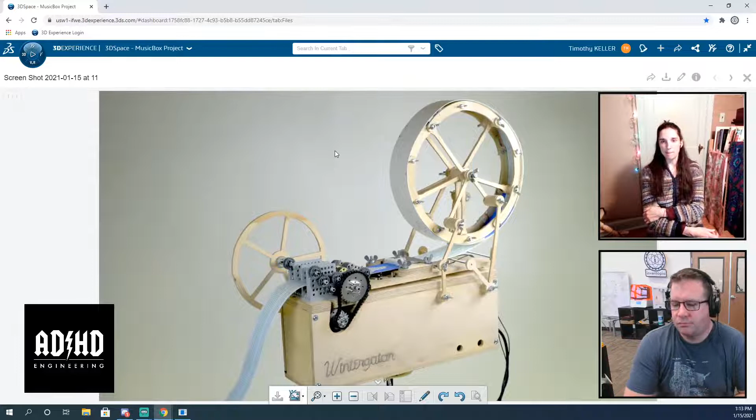So there's still going to be that aspect to it, even though SolidWorks has all sorts of PDM fancy tools we can be using. We're still going to have to tailor it to what we need. But I think we have a much better idea right now about what we're going to need than we did back in May. Yes. For sure.

Yeah. So the idea here, and Jordan, I see your question, we're going to be working with a PDM. Yes, and we're going to be using not the client-server type PDM system SolidWorks has. We're working with the 3D Experience platform, their PDM system. And it comes with project management stuff,

a bunch of stuff that the current Marble Machine team, like right now, Mo is dealing with. We have a bunch of things in Discord. We have a channel for posting status updates. We have a bunch of stuff in Airtable. And so SolidWorks has given us these tools, which is awesome. And don't forget Google Docs. Oh, yeah, Google Docs and inside Fusion itself.

Yeah. So we are trying basically to use the professional tools. Anyway, we're going to be using the SolidWorks stuff as much as we possibly can. But because the project extends beyond SolidWorks, we're still going to have to be using Airtable and stuff. Because we're not going to import the entire database that's full of video and photo reference into SolidWorks because it's already ready. Right.

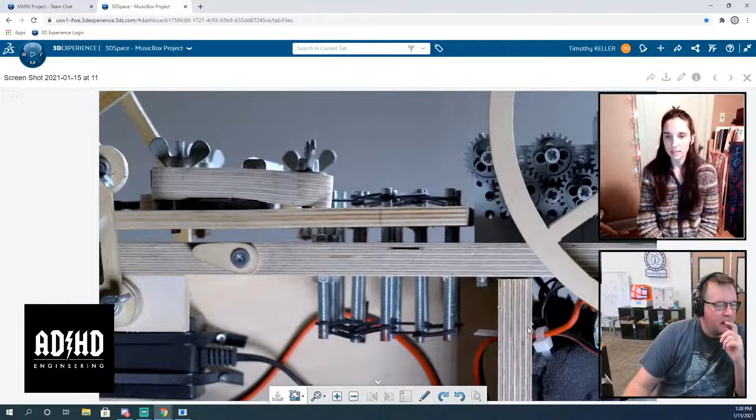The one that was actually on stage. Yeah, some of the electrical wiring was where it wrapped the ground around the whole wire. Yeah, I think there's room for lots of improvement as far as electrical engineering goes. So here's a picture of how that thing folded up and collapsed. Now, if we don't have a collapsible wheel, potentially the entire thing could be just a soundboard. Yeah.

David's asking if there's a specific Pelican case model already determined. And David, thank you for volunteering to find us a Pelican case size, and we'll design that as a constraint. No, I'm not joking, right? I mean, I think I do. I don't know what Pelican cases are. What's that?

They're rugged, foam-lined equipment cases. Pelican's a brand, but they're kind of like a violin case. Let's look up Pelican cases. They have foam, and then you have these little inserts, and you can actually have them custom made, where you give them the shapes. And no, they're not cases for Pelicans. You can upload shapes and say, hey, I want this part to be this deep.

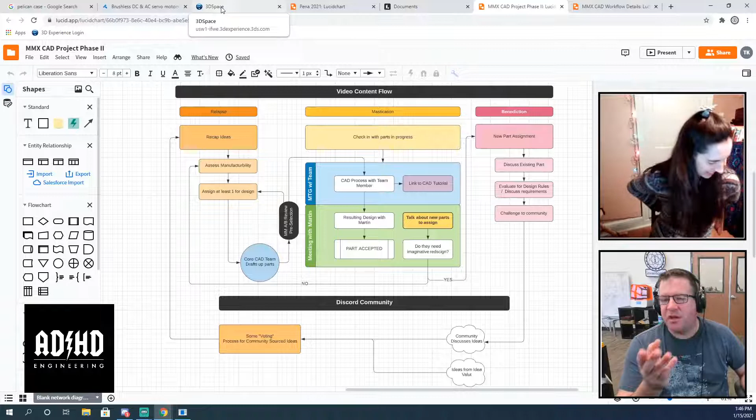What Andre just said was not too far away from the way I was thinking. I was thinking that basically when we had some ideas we liked, we would pick somebody who has one of those 20 seats to be the champion for that idea, right? Yeah, or maybe we'd assign them. We'd have 20 seats and maybe 20 ideas. So going around in a round, whoever hadn't been assigned an idea lately.

So the first 10 people get assigned to the first 10 available CAD designers. They work with the Discord person to work up the idea. Ooh, I like that. That's cool. And then next week, the 10 who didn't do anything this week could start on the next designs. I like it. That might work.

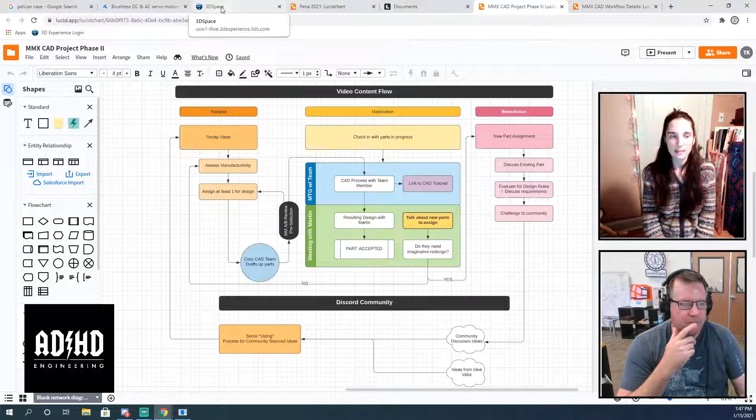Yeah, so someone on the team who has one of those 20 licenses is working with the person who brought the idea in the first place if it's external to that team. Okay. So they would sort of be like the team leader, but everyone would be collecting ideas for the same part. And then whenever one would get promoted, whoever happened to be working up that idea would get that part assignment to build it up inside SolidWorks. Yeah. No, that's figuring stuff out. Woo.

Oh, someone asked me a question. Is the internet finally working? Yes. The internet wasn't the problem. It was my poor old laptop. It's on the floor right over there. Don't feel too bad. It tried its best to serve me well. So I forget what I was going to say. Oh, sorry. No, it's okay. That's why this is ADHD engineering. Yeah, don't feel too bad about the old laptop.

I just recently dumped like 3 old laptops from my closet. I think I held on to them because maybe there's a picture of one of my kids on them, but you know what, lithium-ion batteries, man. I ended up dropping them all into an e-waste bin at my local dump, and I didn't feel bad about it. I thought you were gonna say dump them into a river on your way to work. That would not be ecologically responsible. It sure wouldn't. Okay, we're getting a little off topic, but I'm still running Linux, people. That wasn't the problem. The old laptop was the problem.

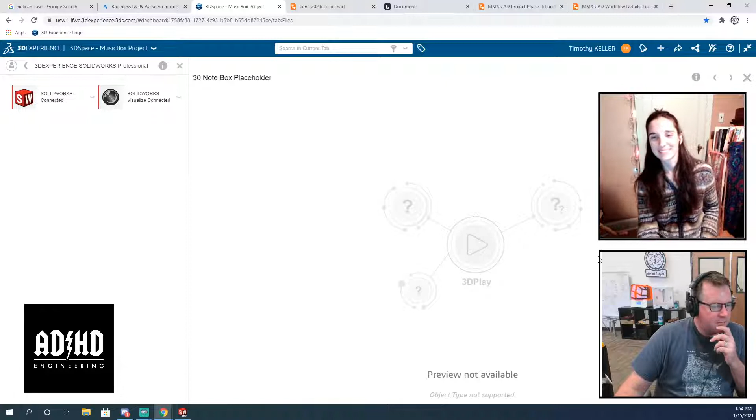I just crashed SolidWorks again. Good job. Do we need to start a crash count? Is that 2 so far? Should put a nickel in a jar every time it crashes. Oh, that would be so awesome. We should definitely do that. Where'd you get so many nickels though? Actually, I have lots of tiny things around my studio here. I'm sure I could come up with something. So we're at 2, right? 2 SolidWorks crashes, just by me and just in the last few minutes. Give me a minute, I'll go get something. All right. Sweet.

I need to figure out how to start an assembly. Why do I hear myself twice now? Oh, because I took off my headphones. Here, I'll mute me. There we go. Now I can hear you and you can't hear me. All right. So what am I gonna do? That didn't work, Maureen. What?

I'm gonna open this with SolidWorks Connected. I really just want to insert this part into an assembly. Oh yeah, that's going to be interesting. No idea how that can be done. Yeah. All right. So now I have it open. And now I'm gonna make a new assembly.

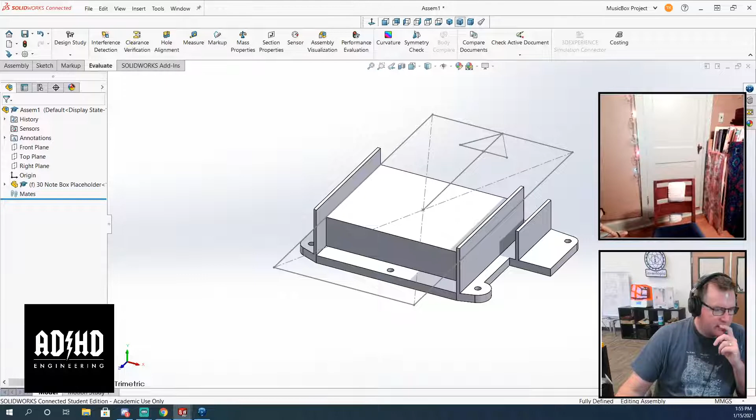Assembly from part. Did you use my file or did you draw it yourself? Did you make a file? I didn't see it. Yeah, I think I sent you a DM about it. I didn't see that. Sorry. Somewhere on the platform. So yeah, the platform doesn't work, if it's not obvious. This is the part, Maureen. You gotta do something. You're driving everybody crazy.

I think. The idea... I can't hear. Sorry, I can't hear it because I'm only listening to Discord audio. Oh really? Sorry about that, everybody.

All right. So the idea here is that I drew this part and I kind of left a sketch in it, and I intended that we're going to use this point of this part as the origin for basically everything. So I'm going to.

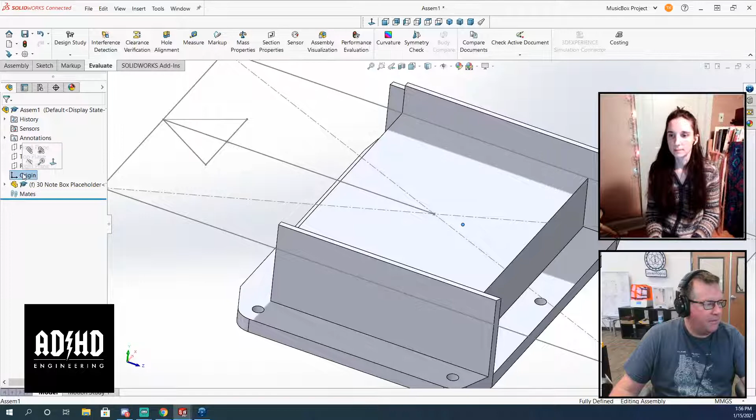Also, did you solve the 30 note problem, 25 note problem? What was the problem? Well, the drawing that you had was not 30 notes. Oh, was it? Yeah, I do not know about that.

That has a satisfying audio. So one of my things that I like doing is beadwork. I have a lot of beads, so that's our counter jar. Nice. And everybody else who's working with SolidWorks, feel free to ping me when it. All right, we'll get a count going for the whole team.

This is a gripe I have too. You see this pop-up menu that I have here? It's almost useless. Yeah, why does it look like that? That's so weird. I have a feeling, so I have two displays on this computer, and I'm sharing the one on the left because the stream is 1080p, and this is an older 1080p monitor. So I'm doing it so I have the image size right.

But I have a feeling that a lot of times when I get error messages, I get them on the right monitor, which is like monitor number 1. And so I have a feeling that it's trying to size that pop-up that kind of way. And where are the mates? It's not showing any mates, but it's still yellow. Like I did one thing and I've already broken this.

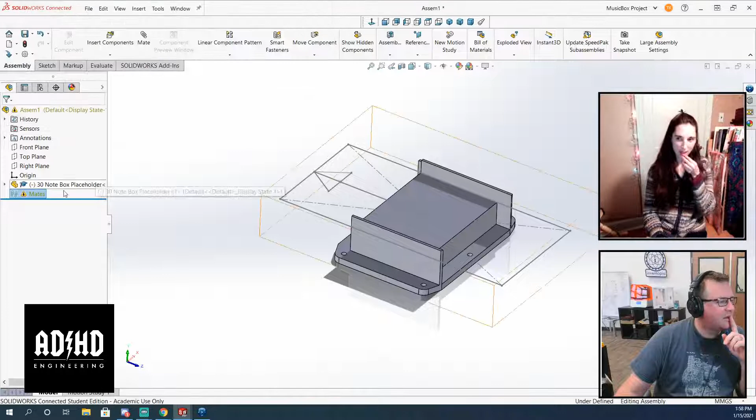What's wrong? David, step in. You know how to fix this, right? Well, usually if you right click there, just click what's wrong. There you go. Edit definition on the feature to correct the problem. Yeah. So the other thing is you see how you've brought in a part? If you right click that and do edit feature, it'll take you to the same window that you started from.

Which one is that? No, if you right click note box placeholder, there should be an edit feature. Oh, that's weird. So that would be on the extrude. No. Like importing the part into the assembly is a feature. You're saying rebuild or suppress the part and unsuppress it. Oh, okay. Suppressed. Yeah, both of those also work.

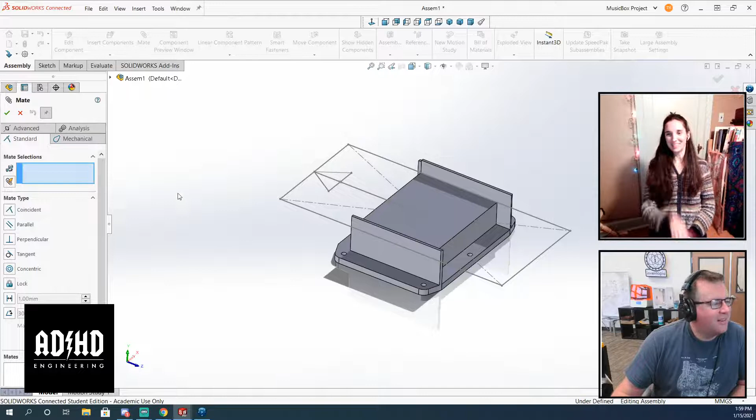Hey. Woo! Teamwork. Yeah, we need one of those audio laugh track kind of things, but not a laugh track, an applause button. You mean Martin's little hooray party thing? Yeah. Should I get an audio sample of that? The one with the party popper that appears over the top of the screen. Yeah, that'd be amazing.

All right. So now we're gonna do what I was trying to do, which is that the center of this music box is at the origin. Oh, there we go. So nice. Press the eye symbol in the middle on the top to hide the sketch. Oh, I don't want to hide the sketch yet. I want this guy, because this guy right here, that's 70 millimeters wide, which is the width of the tape.

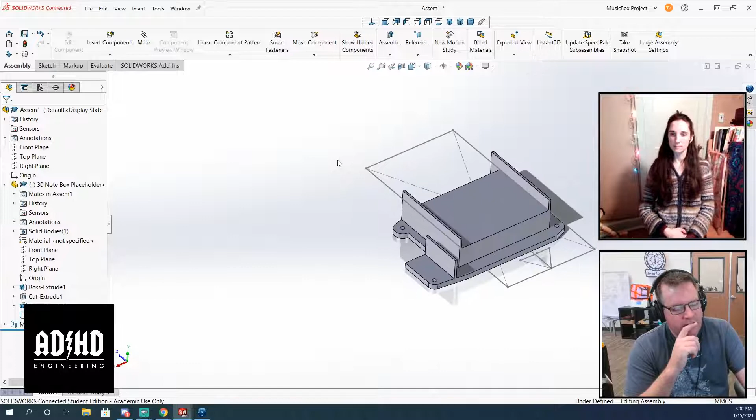Andre, to your question about the 25 note versus the whatever, I saw in the actual description of that 30 note tape that it is 70 millimeters wide. So I think as long as we have that, I've named this file placeholder. So yeah, it makes sense. Obviously, before we actually manufacture something, we'll get one and measure it and develop a real thing. I just want there to be a logical starting point for this project, which is that we have the music box there and we design around it.

All right, so we're there. Now we are in the assembly. I'm going to make a layout sketch.

Yeah, Kookie just posted the little party noisemaker emoji. That's exactly what we're talking about. Except not the way that Martin embodied it. Arthur's in the chat. Hello. Oh, so many team members. Woo! So Newsix has a question. Not directly related to what we're doing, but I guess we could talk about it anyways.

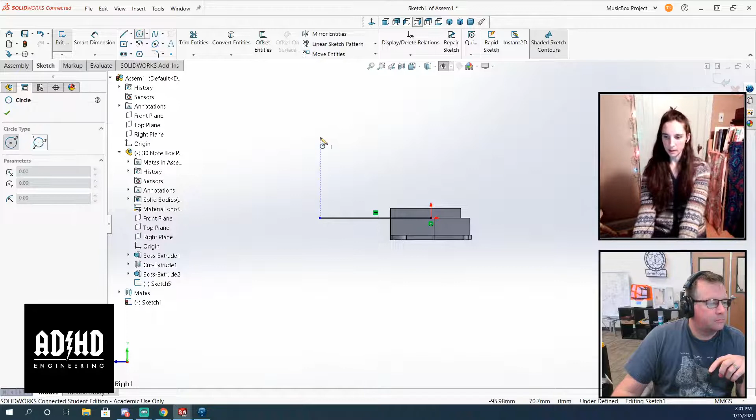So this is related to what Martin was working on this week, which is the shields for the funnels, and Newsix is going to be, or maybe already has been, doing some test prints on his laser cutter to see if he can help Martin out with that. But his question is, any opinions on the marble funnel side plate ideas on Discord?

I think Martin was so frustrated with what happened this week that he just wrote it all off and decided to kill his darling and just kill the opening of the funnel. But I think the side plates are a great idea. I don't see why you wouldn't just design some and send them along with him if you are actually going to be working with Martin. I mean, what the heck? You could put the little holes in and show how it's sewn on, and you could show how it works on your 3D printed little funnel.

I mean, if you have the materials and the time and the willingness to pitch him an idea, he may just be like, no, I'm done with that. Stop giving me ideas. But I don't know if you wanted to try that.

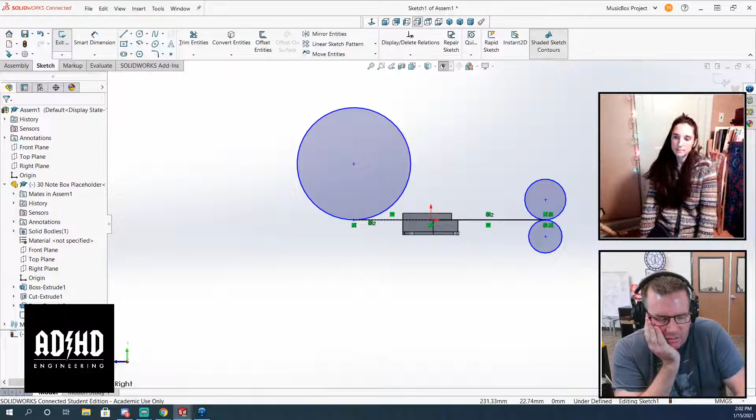I look at those and I'm always happy to claim the funnels as one of the people who helped design them. But the way they were made, the way the moving jaw at the bottom works is based on this concept of the funnels being made out of stainless steel wire, and that was a design constraint. The fact that these are a metal wire that's stainless, that constraint drove a lot of the rest of the design. And if he's willing to consider other things, there's a lot of ways where for phase 2 we could do the funnels differently, including having it be more box shaped.

So it could still be kind of like this, but there could be overlap. The two edges could bypass like that. And even with the existing funnels, he could compress. He could bend in the smaller jaw, the fixed jaw, widen out the wide jaw, and actually weld on another row of wire to create an overlap, right? He could, but mentally he's done.

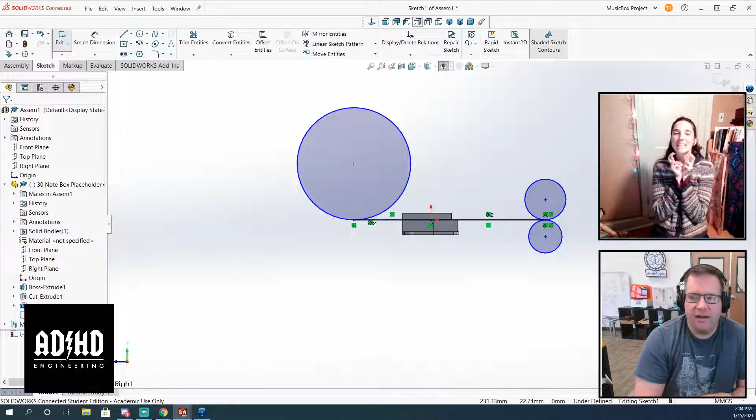Well, mentally he needs to get onto recording music and writing an album, and mentally he needs to get on to meeting with you and me so we can work out some CAD team stuff. That too, I guess. That's what I'm hoping he will do next. I know he wants to finish the machine, but we really just need to talk to him about a few crucial things, because we're running out of defeatured stuff and we're going to be starting all the detailing stuff. We're going to come to a stopping point where we need his input before we can go forward, and I'd like to talk to him before we get to that point.

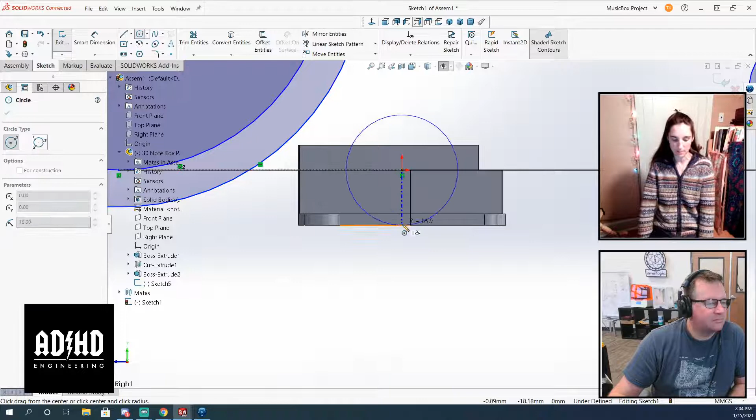But we'll see what happens. Yep. If he's in the zone, that's great. He has a hard time staying in work mode, so I'm glad he's exploring this. But we'll see.

Was there some kind of trauma that I missed? The daily videos this week. Did you see any of those, David? I caught some of one of them. It kind of surprised me. It's like a whole second channel for it. Yeah, it's just his experiment. But the trauma is that he killed the funnel's opening and closing function. They're now zip tied together as just one unit. Oh, interesting. Okay, I didn't know that. Wow.

So the suggestion, NewsX, if you are chosen to help him do those laser cuts, I'd say offer him the suggestion, but do what he wants first. But if someone else gets chosen, the idea vault is just where we dump all of our ideas and we'll deal with it in the touring version.

Oh, sweet. He said it looks like he's been chosen. Yay! Nice. Congratulations! Awesome. The chosen one. The chosen one.

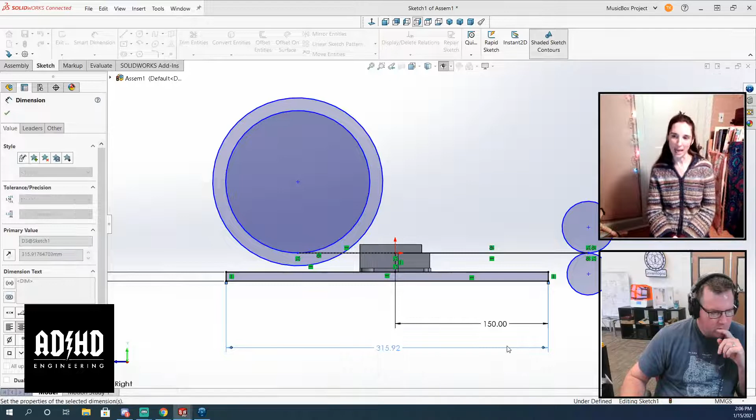So we have some major design decisions to make here. Well, wait, are we doing this now? Because I thought... What? Here's the question: are we pitching this idea, opening it up to the team, and actually using this as a practice of, let's give everybody a week to come up with answers to these questions, and then next week... Yeah.

Will we talk about them, or are we just going to talk about stuff now? Well, I don't think it's mutually exclusive. So what I want to do now, because the primary thing I want to test with this Music Box project is testing SolidWorks and how it works for us, right? How we involve people is another layer on top of that. Okay, but my reason for these tests is the project management side of it. Like, I don't care about the SolidWorks stuff. Yeah, no, that's good. But keep going.

That said, I also think that I have zero qualms about drawing stuff this week, getting some feedback or some new ideas, and completely starting over from scratch next week. Right? So what I want to do here is, we have our list, of course that part crashed. So let me bring up our design requirements again. Wait, it crashed. Do we need another? No, we already counted that one. Okay. All right.

Okay, wait, so just to check, can you see where my drawing is on here? Oh, it is there. It says Music Box CAD. I think that is my file. But I can't see your files on my thing, actually. You might have to share your dashboard with Andre and everyone. That's one of the things I have to figure out how to do, create the home base of what we're all looking at and working with, and I forgot to teach you all how to use it. Scroll down. I can see them, actually. Oh, you can. Okay. Good.

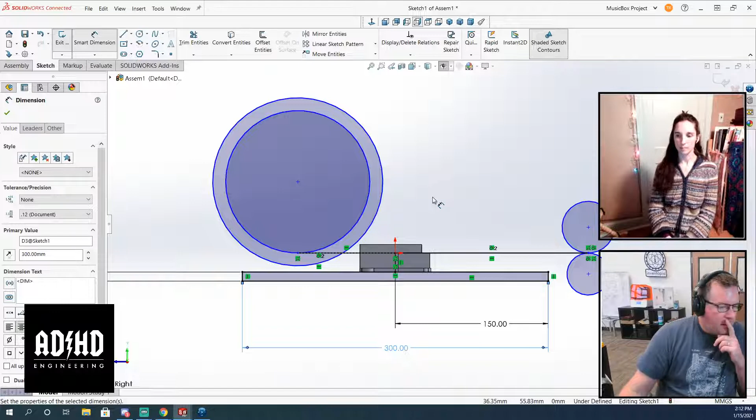So I've been using SolidWorks for 10 years, off and on. I think we're newbies to the 3D Experience, not SolidWorks. I think the thing that SolidWorks is going to get out of this is apparently the platform is new for everybody, and so if we can develop this and give them some feedback. Let's break it. Yeah, exactly. That's the plan.

Hey, well, we have our perfect software breaker. David is our guy to find anything. It's his magical power, I swear. Oh, and for people watching, David is another CAD team manager. He's our SolidWorks guru. I don't know if I would go that far, but I'm a SolidWorks user from my past employment, and I'm an evangelist, I would say. Okay, that's more really what you are. Because we can't get you to shut up about it. So that and the metric system, right? Those are my two hangups.

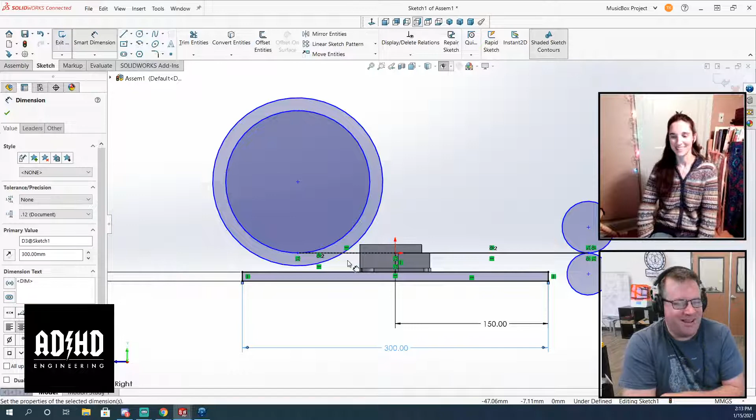Yeah, David has actually radicalized me for metric. I did the first in-depth video for my second channel, and I realized I'm designing everything in feet and inches. David's gonna kill me. It's like at the back of my head. I genuinely felt guilty. That's what he wants. He wants that fear. No, it's good.

NewsX has a question. Does CATIA actually work with this? It does. We actually have access to CATIA for some reason. But what we don't know yet is how we connect people. I think they have to have SolidWorks 2021 in order to share files, and if they don't have 3D Experience, we don't know how we can import files from people who aren't on the 20 seats that we have to give to the team members. Maybe that should go on the list of questions. Yeah.

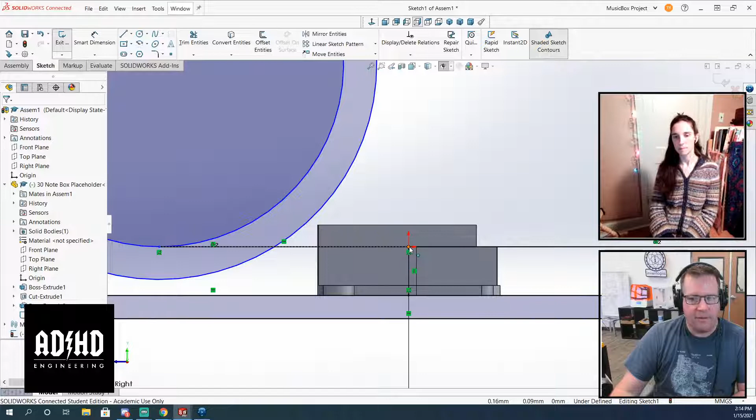All right, so here's a question I have. Trying to get back into design stuff, the meat and potatoes, overall design decisions to make, right? One is here. So this is how the paper releases from this wheel and gets pulled through at the end of the song. He just has a slot in it. But I'm realizing as I'm designing the layout sketch that I've constrained this line horizontal. The way I designed this placeholder part, the music box origin is the level of the paper. So I don't know that this infeed line needs to be horizontal.

And here, I don't know why I had to hit that. It needs to be tangent, but it does not need to be horizontal. Oh, what did I just do? There we go. Also, the paper isn't infinitely thin. I don't know how much that matters at this scale. Well, part of me is also thinking that's why. Oops, that didn't work. I was hoping to make the dimension driven. Cancel.

I don't know that I want to make that assumption yet, so I'm going to delete that line for now. But here's a big... I mean, I guess it's not really a big decision because we can change it. But how big is this going to be? 200 millimeters. So how big is the other one?

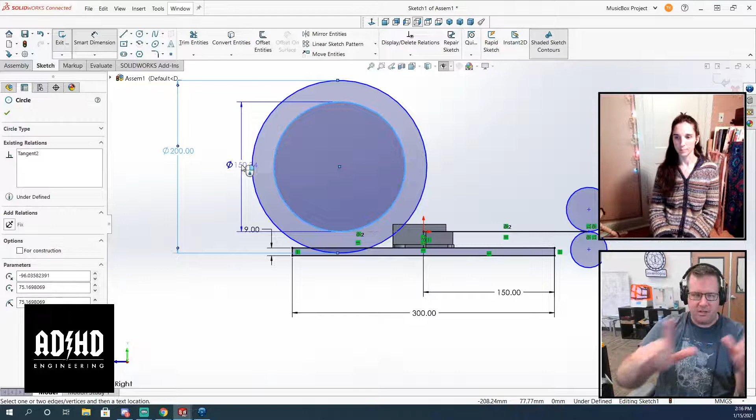That's the outside lip. I'm thinking that there's going to be a U channel, right? The paper is going to be in it a little bit, so the paper won't fall off the edges. And yeah, we don't know how big the other one is. So this is how knowing what case it's going to go in at the beginning can be pretty useful. Yeah, because then you can have the maximum envelope of whatever can fit.

Yeah. Thank you for volunteering again, David, to find the case. Well, in the chat I put a link to a Pelican case that I actually own. It's the 1510, and it's specifically made for carry-on dimensions, but the inside is pretty big. Which chat? Oh, CAD team chat. It's just higher up.

So as far as how big the wheel should be, I don't think anybody but Martin really knows how big the MMX is compared to the original one, but wouldn't you all say it's roughly the same size? Like, what do you mean? Okay, so the programming drum, he had to come up with the size that's on the MMX right now from something. Did he just grab that diameter from the old machine? Anybody know? Oh, the programming wheel.

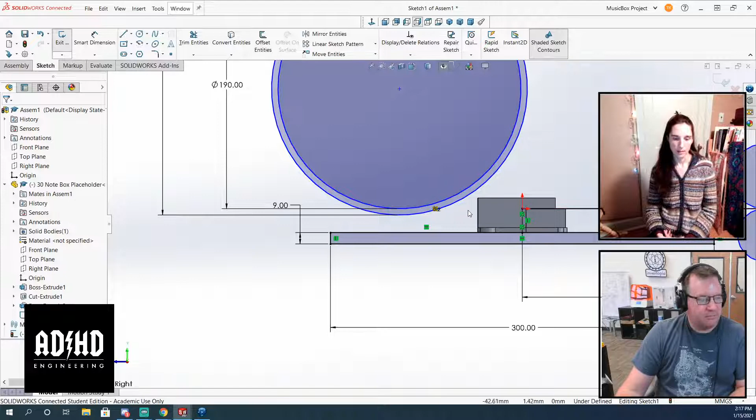I have no idea. Because if we are designing this music box to be the MMX equivalent of the original Marble Machine in music box land, then I think we should try and keep the dimensions of the original design intent, because Martin is such a visual person that the size he made of that collapsible wheel was partially dependent on the case, but also partially dependent on what he thinks looks good. And I don't think we should ever make design decisions without that in mind. We should always keep what Martin thinks looks good.

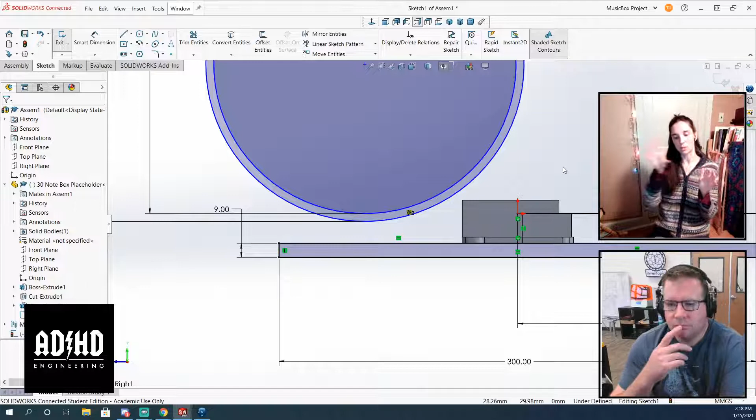Yeah. And he made that wheel so you can visualize the turning motor. Yep. The size that he did, either he traced a plate he had or whatever, I think we should try and keep that. So we'll probably have to figure out dimensions. This is where we want to bring in the guy from the community who's actually building this music box in real life.

Can I interrupt you for a second? Yeah, go ahead. Does anybody know why I can't get rid of this constraint? I've been trying to delete this. That's so weird. It's brown. I've never seen that before. This goldish brown, that's a broken constraint sort of thing. And it's still yellow. Wow. Try leaving the sketch and coming back into it and see what happens. Thank you, David. David wins. That happens sometimes.

Amazing. Okay. It's a soft crash. It's like a crash, but it's different. Yeah. No, that jar is only for hard crashes.

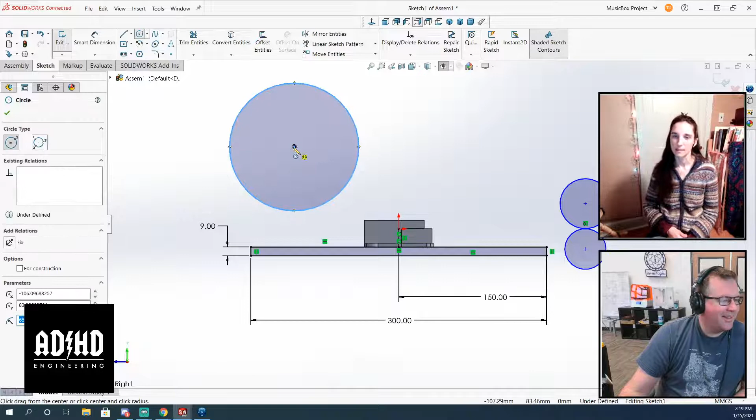All right. So let's try to figure out what we think the size is here. Oh, look, here's the music box. Look how big that is. We don't have to get it perfect, right? But standard Lego gears. Yeah, eyeball it. Let's try to eyeball it from that. Those gears, way bigger than this. I know those gears. Those Lego gears are like 3 inch diameter.

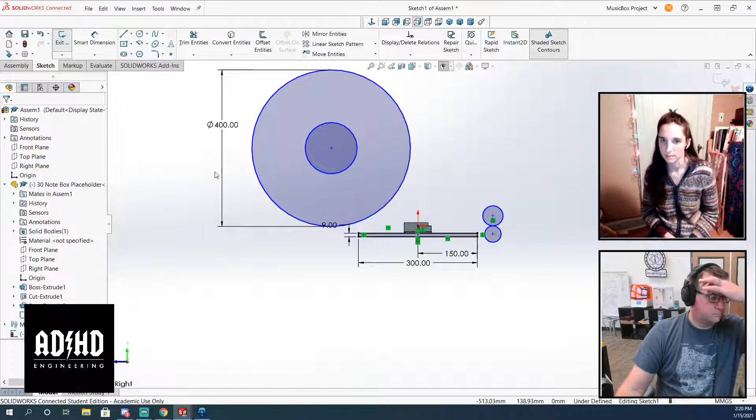Sorry, what was that? Me or Andre? I'd say it looks like probably 400, something like that. But who knows? You should do the old Andre: bring that image in as a background plate and just trace it. Yeah, I know how to do that in Fusion. I do not know how to do that in SolidWorks. Something new to learn. I'm not gonna figure it out while I'm streaming.

As of at least the 2018 version of SolidWorks, the last time I tried that feature, Fusion is infinitely better at that particular thing. Just FYI. David just said the words, Fusion is infinitely better than SolidWorks. But you're already taking him out of context, and that's not nice. I know. Those words came out of his mouth. No, it is absolutely a shortcoming.

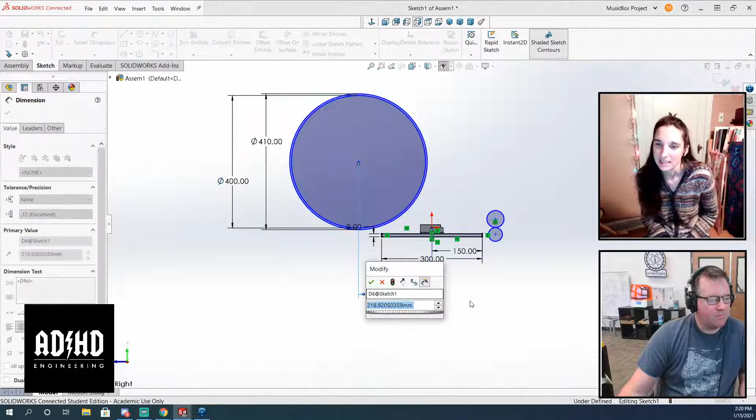As of a couple of years ago anyway, in Fusion you could bring in whatever picture you want, make it a canvas, scale it, and you're good to go. In SolidWorks it's very low resolution. The hack way to do it is just Alt Tab real fast and line up the image behind your screen. I was able to do it in my file, but I've now forgotten how.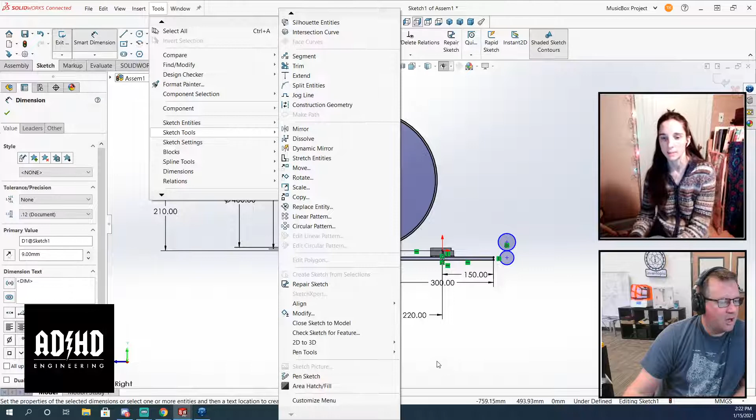Sketch picture. Not available to me. It's there. There's something called image sketch. Well, it says right there. Yeah. I don't know. Okay, we tried. You have to be inside the sketch to be doing that. I am inside the sketch. Well, all right. Maybe you have to make a brand new sketch. Yeah. Whole new sketch. Oh, it starts a new sketch, so you can't already be in one. I don't know, I just did it like that. Well, I also don't have a perfectly orthogonal image of the thing. Yeah, but we only need vertical scale.

Don't be in a sketch, Tim. Try one more time. Just don't be in a sketch and make a new one. It'll make a new one. You guys are killing me. All right. Do it. All right, I don't think that's gonna work. You have to create a brand new sketch. Yeah. So sketch, tools, sketch tools. I haven't set up this computer, it's so new. Yeah. Okay, it's not there. Just do a new sketch, whatever. Just try it. New sketch, and we'll do it on the right plane.

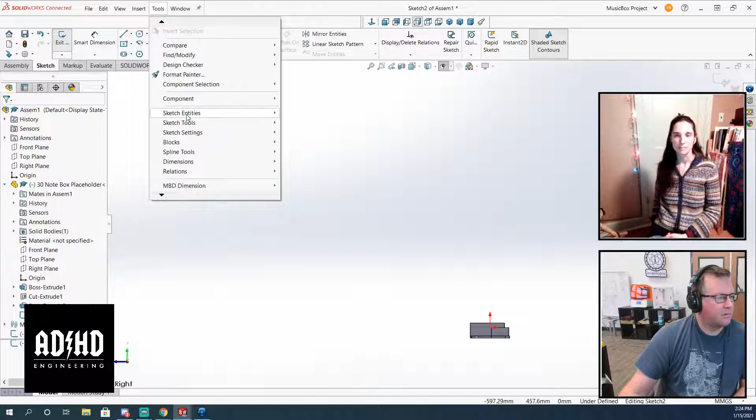Oh wow, there's a new feature now. This is new. As of 2021, you can import a high-resolution picture. It didn't used to be like that. Sketch picture is not there. But you can't do it. Oh my god, mine worked. All right, so for the sake of professionalism, how do I do image sketches? We've put that in the questions. I think we've given it enough tries. Yoren says maybe it doesn't work in assembly sketches, so we'll learn this later. But thank you for trying, because this is us utilizing the knowledge of the team in the chat. But I would want to use it in the assembly sketch because we're doing the assembly layout.

I've got it working, for the record. Oh, because you're a special guy, aren't you? And in assembly? I am in a part. Okay, well, maybe that's it.

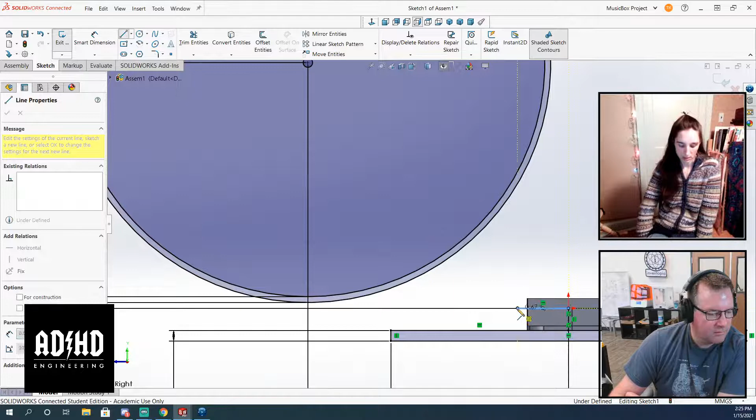All right, so axle size, we're going for 8 millimeters so that we can use an LM8UU bearing. Well, David, do you want to throw that image in and try and figure out how big they are, while Tim's working over here? Where do I get the picture? So Tim, can you throw that image in the Discord chat? Look at us utilizing all the platforms. No, I can't, because where I clipped that image from is on my laptop and I'm on my workstation now. But I just screenshotted the image out of YouTube on the Building the Music Box video. So if you go to that video, he has it on a turntable and he's going around it. I'm sure we can pause it at a place where we're orthogonal to it and grab that picture.

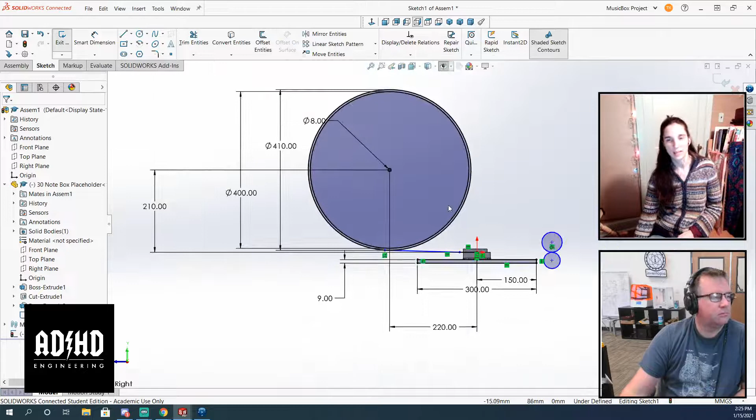So with my fancy new fast computer, which by the way is still not that good, but it's way better than my poor old laptop, I will do that right now while you're doing that, and then we can all work on this together. Okay, so this is just an old Wintergatan video? Yeah, I'm getting it, David. I'll get you the image. Hold on.

Building the music box. New video today.

Yeah. So I don't have Discord on my PC. I prefer not to install it, so I've got to figure out how to get it. Okay, well I'll get you the link and I'll put it in the chat. From the platform, right? Oh, right. Yeah, I should be able to do that. Oh, yeah. Are you logged in there? Yeah, I'm opening it right now. Oh, that'll be a good test of using the 3D experience. Yeah, why didn't we think of that? We're so used to having to have a workaround.

Well, I don't know that I got a really good orthogonal shot uploaded. The two that I got, I wasn't really trying to do that. So it's okay. We're still just eyeballing. It's all right. Okay. But there are other big picture design decisions I want to get to. And one of those is, how do we do this drive mechanism, right?

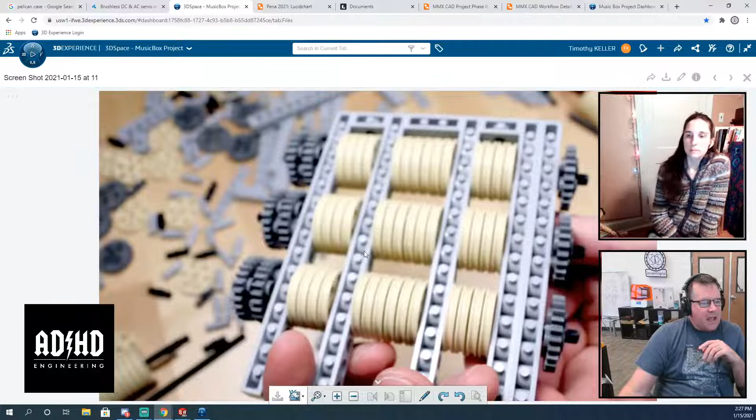Martin's version of this machine, he used all these Legos, right? And I think he did that because the Legos are hard, and he was just increasing the surface area. So in order for the Legos to actually grip, he needed to have a lot of them. There's one of those assembled pieces on the bottom and one on the top, right? Yep. And they're sort of compressing the paper, and the motor is pulling it through.

Right. But they're all linked together, and I think the issue is that they didn't have enough grip on the paper, so the reason he did all of these rolls is just traction. Well, if all you have is Legos, yeah, but why can't we just get two rubber rollers or something? You're going exactly where I'm thinking, which is that we can get rubber drive rollers. Let's go to McMaster-Carr, McMaster.com, they have rubber drive rollers in every single shape and size you could possibly think of.

So my assumption, and the thing I'm looking for feedback on, is which ones? And Jorn is saying 2 rolls of the PVC sleeve. They have these in different durometers, from really soft. They have them smooth. They have them self-cleaning. They have these little belts in them. Oh boy, lots of options. All the options we could need, right?

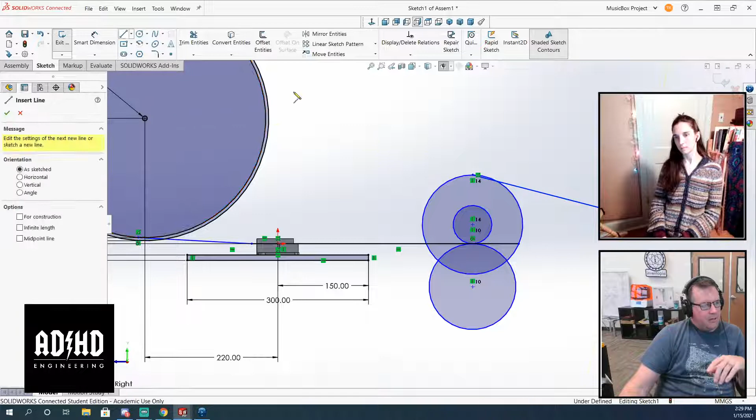So my thought here is that if we have a slightly larger drum here, and then a roller on this side, then we can basically have this roller, maybe with a gear reduction pulley on it, with our motor attached through a belt to this guy. Right now I'm drawing the belt just for illustration purposes. We can put our visual indicator on this smaller one. I'll try to reposition this so YouTube can see it. Right, and then this is the drive roller, and this is an idler.

And if we have the motor on this guy over here, this assembly, this piece, that piece, they're all on an arm that pivots. Oops, I don't know why I did that. I thought I had a line that pivots down to here. Then the weight of this motor with this drive roller can give us the clamping pressure between these two. One of the things he didn't do on this design is these are all fixed together. I don't think he has a way of doing variable clamping between those two. So he just came up with that design through testing, then, right?

Yeah. Again, utilizing the community, maybe we can brainstorm about what does this function of feeding paper through, like talking to Lucas about how it works for player pianos. Something has to be doing it. No, that's probably reel to reel. Right. Well, I know that. And the thing about reel to reel is that they just go. Right. And this is a different thing.

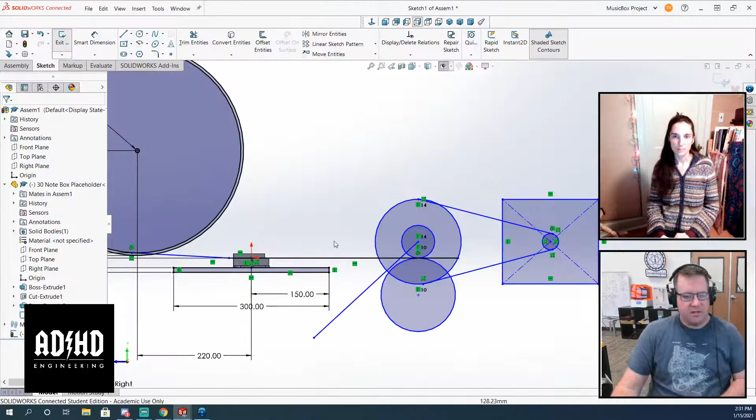So that's a primary design decision to make, right? If we had an uptake wheel, we could put an uptake wheel over here and drive that, and then it's done. We don't have to. But if we don't have an uptake wheel, then we have to have a paper puller.

Or really like a paper pusher, right? You can't push paper. Oh. There's a joke to be had there. Yeah. You heard it here first. It's impossible to push paper. Yeah. Yeah, unless you work in Washington.

But that's a very thin... It's a thin cardstock. It's not a thin paper. When you see when he punches it, you have to.

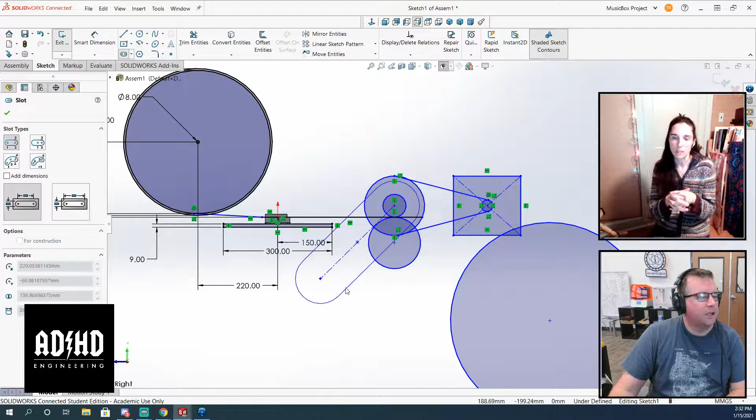So, anyways, just trying to ask the community. How I envision this working is there's a question that we have and we don't know the answer to. We have a lot of options of what we can order, but we don't really have the money or time. Maybe we have time, but we don't have the money to order all the options and see which is best. So utilizing the community's experience: should the one on top be rubber?

And then, you're saying one of them is actually the motor, right? It's not two rolls. Yeah. So I'm thinking that this square thing is our motor. And it has a timing belt going out to a pulley, so we get a little bit of reduction going on. And the gear reduction is not necessarily for strength; it's just to increase the resolution of the encoder, right? Any of these motors is capable of going way faster than we would ever want the music machine to do. So it would just be to bring the motor more into the high end of its normal RPM range.

Oh man, that didn't work very well. I just want this thing to be tangent. All I wanted is tangency, man. Lauren is saying SolidWorks has a tool to draw belt sketches. Yeah, I know that exists. I don't know how to use it. Let me experiment. Not going to learn right now.

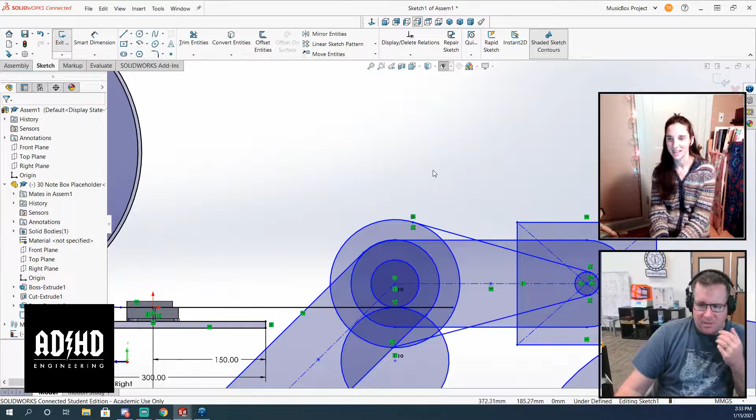He also said the upper roller is fastened with an eye bolt, so you can change the gap, and probably best to go with rollers that use belt pulleys so they can slip if something goes wrong. Mm-hmm. Yeah. So the idea here is that this is a timing pulley, and then this guy drives this drive roller here. And when we're talking about vibration isolation, this is the other thing, right? I have these two slots.

The idea is that in order to feed the tape in, this whole thing can rotate like this, in that direction. You can pull the paper out, pull it through the music machine, lift this thing up, put it between these two drive rollers, and then the weight of this motor that's out on that arm is what gives you the friction between the drive roller and the idler roller, which is this lower one. Okay. So someone tell me I'm stupid, or if there's a better way to do it. Well, not that you're stupid, just other ideas. Well, so what are the other ways?

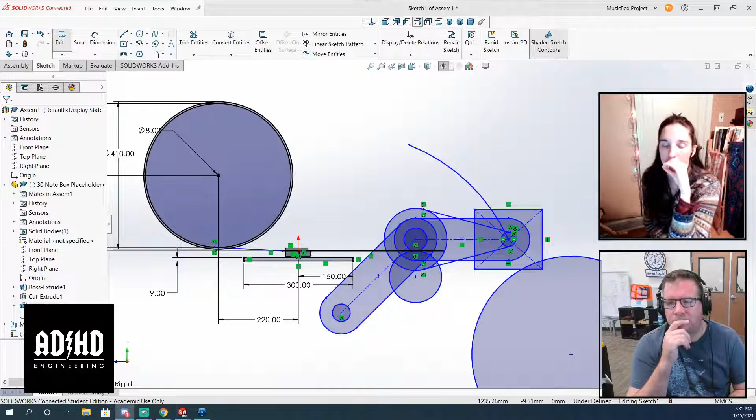I mean, with paper, you might not even need a roller on the bottom. You would just want it smooth. I could see it being an aluminum cylinder, just a solid one, not even moving, and the top one is the only one that's rolling. I just don't know anything about how you get something to work like this. One would probably have to be rubber. So this is that idea, right? I don't think you want to slide paper on metal because it'll pick up all this black stuff and get rubbed off. Okay. I'm trying to picture what I'm visualizing.

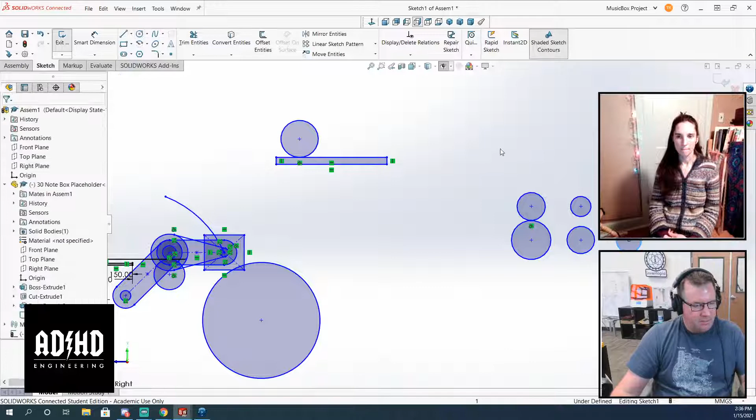I like the double roller idea. We could also do multiple rollers, right? This is the way that Martin did it. Sorry, I have to keep cognizant of what people can see. This is the way that Martin had it before with multiple rollers. The whole issue here is that you have more surface area, but I actually don't think that matters; it's a function of the friction that we can create in this system, which is also a function of the pressure in between. So what in the real world works like this? I was going to say, I have some experience.

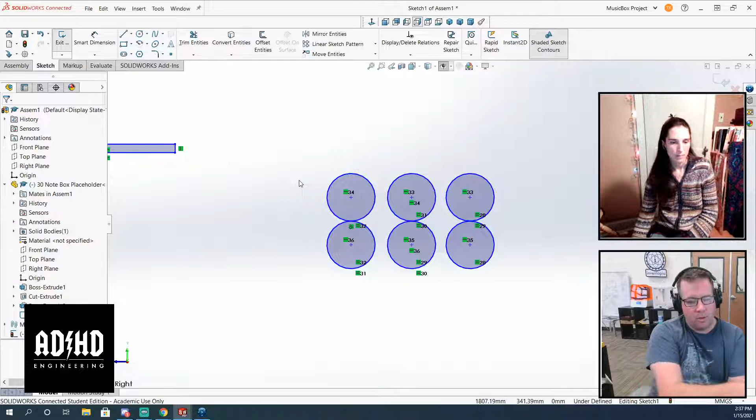For my last startup company, our product's first manufacturing stage was the lamination. I took 2 layers of polyester that had been treated, and there was what was called a nip roller, basically a driven roller next to an idler roller, and they just press them together, and this is the same thing. The only reason you would want more rollers like this would be if you can't get a good enough bite on it.

And I've seen systems where you have a larger kind of drum, and then you have multiple rolls around the side of the drum, and these are your idlers, and you would do this in case you want to spread out that pressure and have a good tug on it. The downside of this, let's say this is the paper coming in, is that it would be hard to do that initial feeding. That makes sense? Yeah, on stage, loading a new song, it'd be like, all right, hold on, guys.

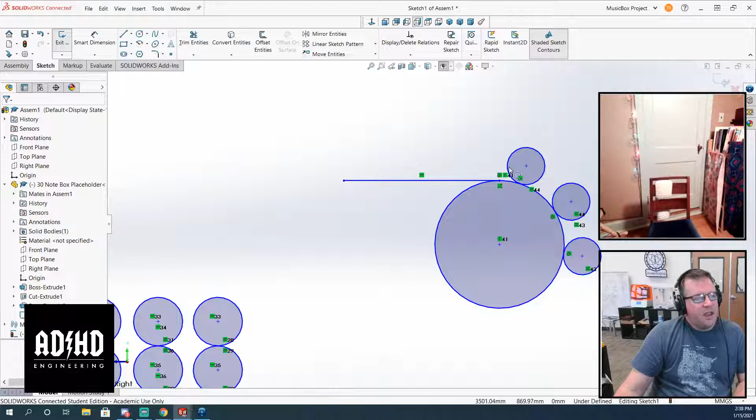Yeah. And consider how awesome it would be if all these rollers opened in different directions, like the whole thing just disassembles itself like a mouth. Yeah, that would be cool. If these were on an arm, like the idea I had the other time, where these are all on an arm and they can come up together, this could work. But I don't know. I mean, putting in mechanical complexity when it's not needed is not anything like the Marble Machine project.

Yeah. By the way, I don't want to change the subject, but I just did the scaling thing with one of the pictures, the one with him on stage. Sweet. And I can report back that however SolidWorks is doing it now, it works 100 times better than it did a couple of years ago. And I can say that the outer diameter of the big wheel is almost exactly 350 millimeters. I'm gonna make this 340, and this is 350. I could measure the small wheel too if you want. No, that's good enough because we may not have a small wheel.

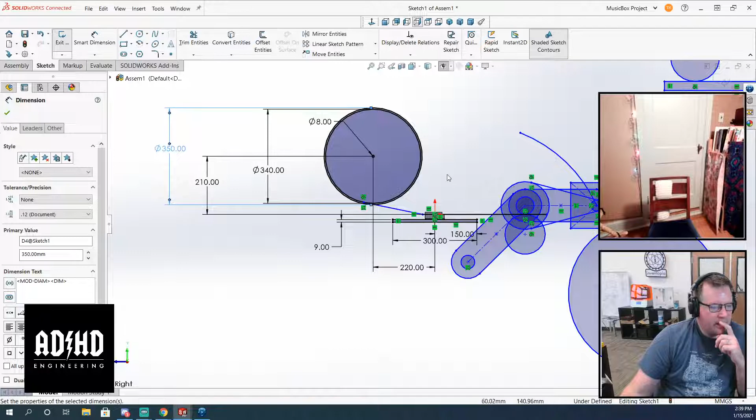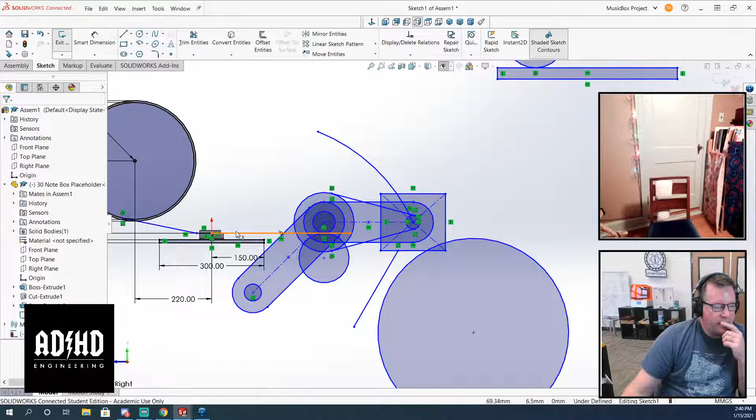Okay. So my feeling is that with 2 rollers next to each other, if the weight of this motor isn't enough to create the friction we need, then a spring between this thing and the body down here would give us the friction we need. And that's really all we need to do. It's not like there's a lot of resistance to pull this thing through. This thing is going to be on a bearing. These music boxes normally operate by little cranks, right? It's not like there's a huge amount of force going into it.

So I wasn't fully paying attention a few minutes ago, and you said you're eliminating the small wheel. I'm assuming the small wheel is the take-up wheel. There is no take-up wheel on the machine at all at the moment. Well, then what does the small wheel do? It's just a visual indicator. The paper comes off the big wheel so slowly that it's hard to look over at it and know whether it's working or not. So he wanted one moving a lot faster, so he could look over and tell if it's turning or not.

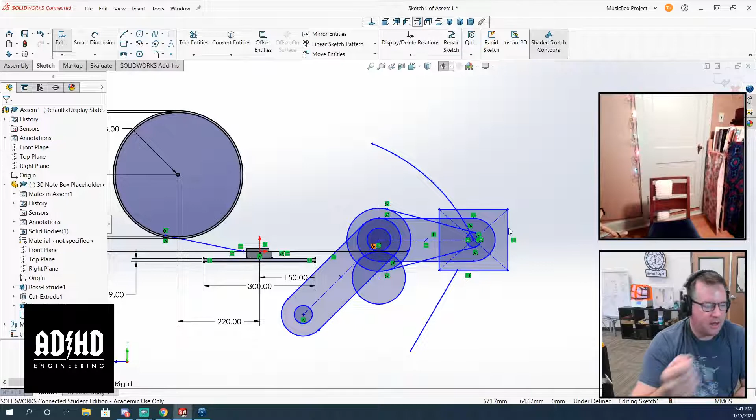Because there's dead space at the beginning of a song, right? So if he's turned it on and there's no power, he doesn't want to wait 15 seconds to figure that out. Yeah, I totally get it. It makes sense. But you could almost take advantage of that concept and turn it into something that does something. Well, we have an opportunity for a small wheel coming off this motor shaft, especially if we're doing a gear reduction here with a belt, we can add a cosmetic indicator. We could put a Wilson right here and have that thing spin, and he would know exactly what's happening.

What if every gear was a Wilson? What if every single circle on this machine was a little Wilson? We have achieved peak Wilson.

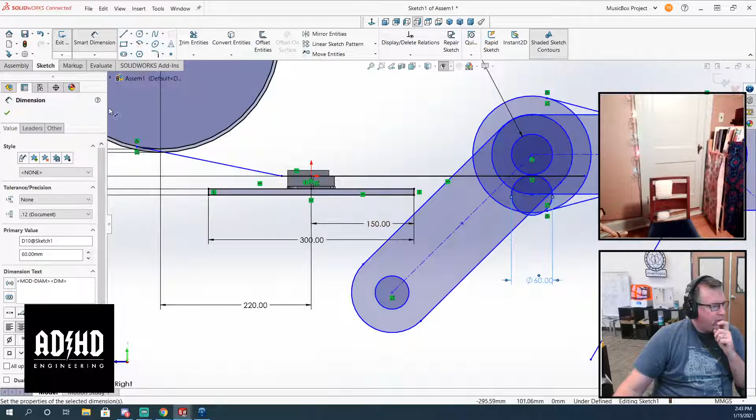Right. You just put a keyway thing on a bearing, right? That's true. That's true. So, and then, you know, I don't know that we need this arm sort of thing. But let's try to finish the layout here. So this dimension is set by the design requirements. He tested this. He likes how it sounds when there's a 9mm thick board for the music box to be on. The contact microphones are going to be on this left side, and then the way that this is held is with the vibration isolation mechanism that goes right through here.

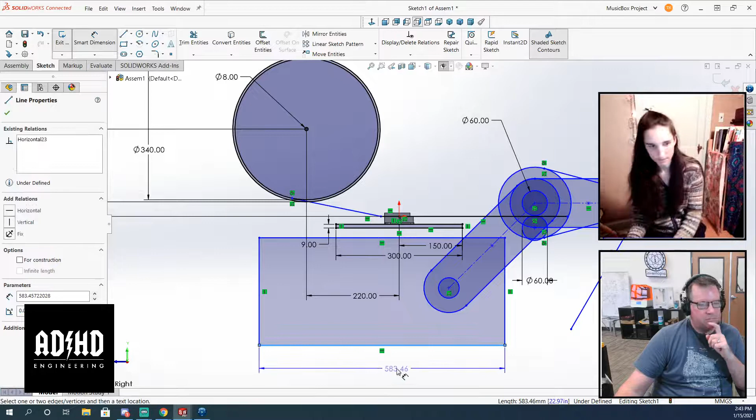So let's draw the case or the main body box. One thing that's different about your design that you've drawn right there and the actual box is that Martin put the motor on the bottom inside the box, and you're going to have it hang out the front. Yeah. Well, you could still put the motor on the bottom if you wanted to, because as long as it's pivoting on that pivot, it doesn't matter, right? Well, I guess it'll have more levers this way.

Yeah, but that's the question, right? If you take these ideas apart, there is the idea of having an arm that can be lifted up, so you can feed the paper through and then closed. That's one idea, which is a standalone idea. The other idea, which is that the motor is helping with that tensioning, is a separate idea, right?

It could be that we could have the motor, and again, the motor might be a bad idea actually, aesthetically; having a big ClearPath servo motor sticking out there may not be appreciated. It might be that we want it here, and then there's an arm that comes up here, and the motor is down here, and this whole thing can still work if we put the motor down in the body.

Also, the music box has an idler roller on it already. So if you're thinking that you're going to be able to open up this lever and then shove the paper in there and close it, you're going to have to disassemble the music box to do that. So that is another question, and not exactly in the way that you were saying, which is that the box, there is a thing you have to feed it through here, right?

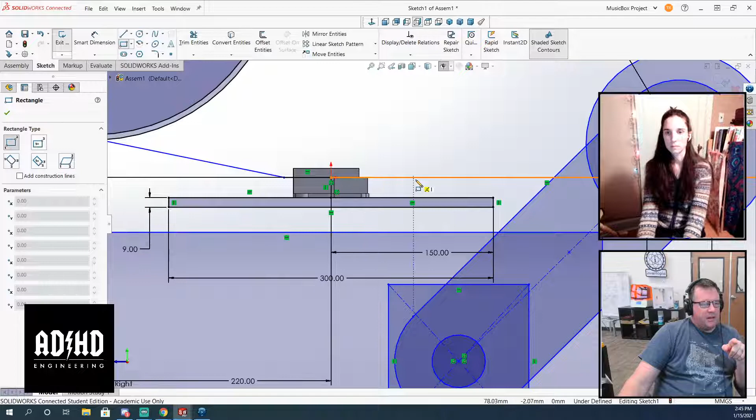Yeah. So, and the reason I bring this up is that if we had a thing like this, there is a potential that if we could figure out a way to make another plate that came down on top of this so that you didn't have to feed the tape through, then you could actually try to close this circuit, and you could use a loop of paper. You'd have to be able to take the loop and slide it onto the machine, right? That wouldn't work unless you modified the music box itself.

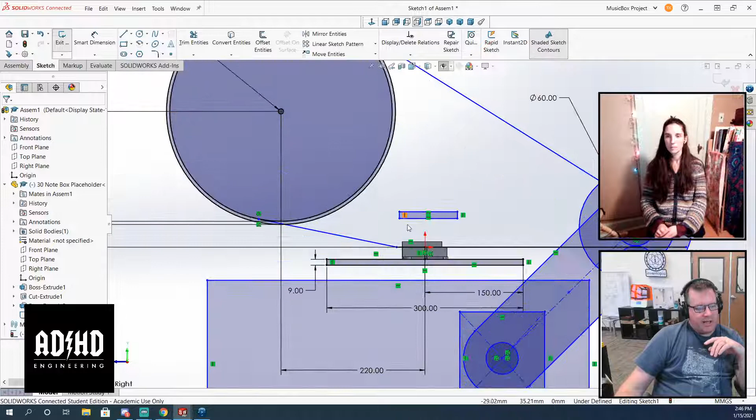But if we could have the thing that holds the paper down to the music box be something that also articulates, because this arm here doesn't have to be on both sides of the tape. It could be on one side with the spindles coming off of it. Am I making sense? This is a design requirement question. Should we make this thing able to play an endless loop of paper music? But we're not the musicians. Like, how can we answer that? Well, normally we would have a client to talk to.

Right. Yeah. We're doing design thinking for a client that has not asked us to do this. So I would say we stick to only the original requirements of the music box as it exists right now. Yeah, that's valid. But here, how about this? We make the MMX version of this music box to match the Marble Machine, so it has a baby, and then we phase 2 it.

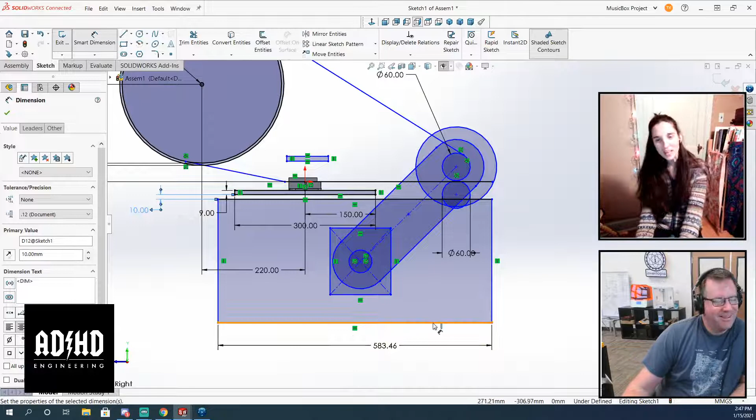So we make another version that's all beautiful and functionally perfect and everything. Well, I think if we can create something here that works the way that he has, right? I'm going to feed it a piece of paper, the paper's going to go out on the floor, but we can flick a switch and I can set the BPM reliably. I don't have to worry about the motor not starting. It's not going to mangle and break the paper that comes through it. Then I think we're good, right? I think so too.

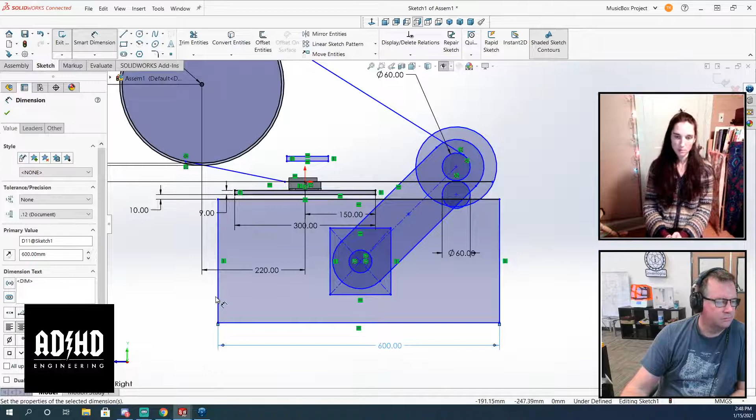I mean, we could make things more efficient and ideal till the cows come home. We could do this forever, but for phase 2, Martin's going to be directly involved with us, likely in these streams, picking designs and having lots of feedback for us to work up his ideas with. So having this as a test project, great. We don't know what Martin would want, so we'll just guess and make something that looks like the MMX, and if he likes it or not, it doesn't even matter, because this is our practice project, learning SolidWorks, learning 3D Experience.

But we will have his input on the actual thing, so potentially, if he likes what we've done here, making the snazzier, more robust version of his original design, then maybe he would want us to make the next version. We have to stop ourselves from going into crazy whatever land if we don't have any input from him, I think. Right. So, yeah, that'll be good.

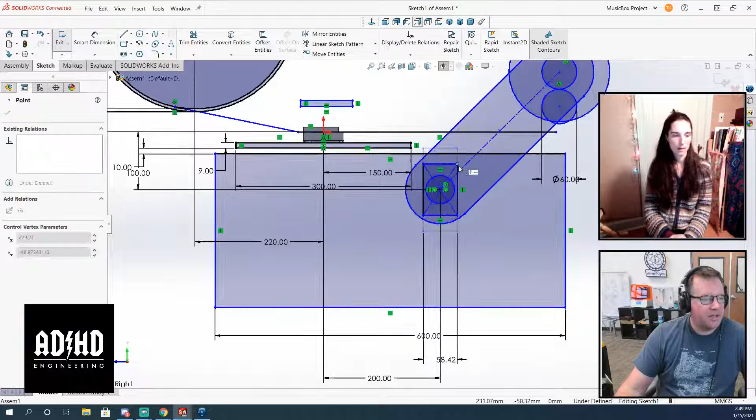All right. I'm just realizing if that's 2.3 inches, I'm almost at the point where we need to import that motor for size comparison. Sure. David, can you try to find me dimensions of this lower box? Yeah, actually, that's very convenient, I've got this open right now. David, where are you looking at stuff within 3D Experience? Yeah, so I downloaded the picture of him on stage with the paper tape in his hand, and I picked a part of the tape that looks like it's pointing straight on to the camera. It's hard to tell, but I said that's 70 millimeters. You said it was 70, right? The tape is, yeah.

And so then I took that and drew circles onto the wheels, came up with about 350 for the big one, 240 for the little one. It's probably close enough. We can throw those measurements in, eyeball it, say good enough, call it a day. Right. Okay, so the length of the box looks like 525, and the height looks like it's 240.

Okay. But oh, what did I just do? Oh, that wasn't a crash. I thought it just crashed. I hit something else.

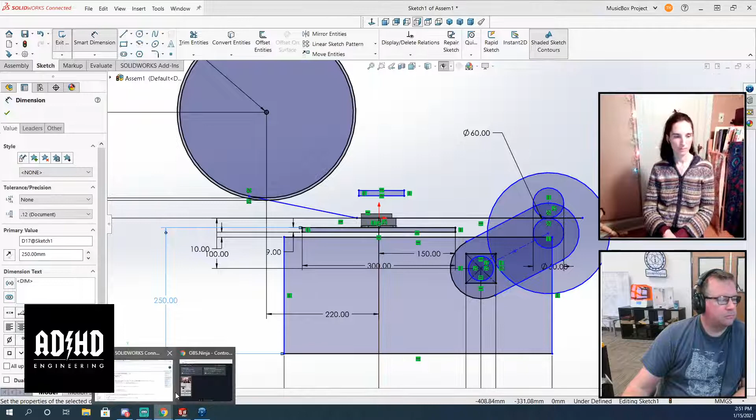Unless that's a door flipped open. To be honest, it's hard to tell from the side what this looks like. Well, I'm gonna round up and make this 250 from the top of the soundboard. Again, it's hard to tell what I'm looking at, because it looks like maybe the side door is open, and I'm not measuring to the bottom of the side door. I have to look at another picture. The length is absolutely what I said, 525. It's just the height. All right, this thing doesn't have to be a photorealistic reproduction.

Just tracing with my fingers on the screen, the width is about 2.5 times the height. Have you calibrated your fingers on a certified surface plate with a height block? This is what is meant by eyeballing, man.

Yeah, so looking at the picture you've got on YouTube right now, that lid was flipped open, and I measured to a wrong dimension, but that's fine. The length's still 525. It would literally take me 2 seconds to give you the height. I'm looking there at this offset of the center line of the drum to the back. Right now the way I have it in SolidWorks, it's off the back side of it. Looks like about 215. The height, 215 of the box. Yeah.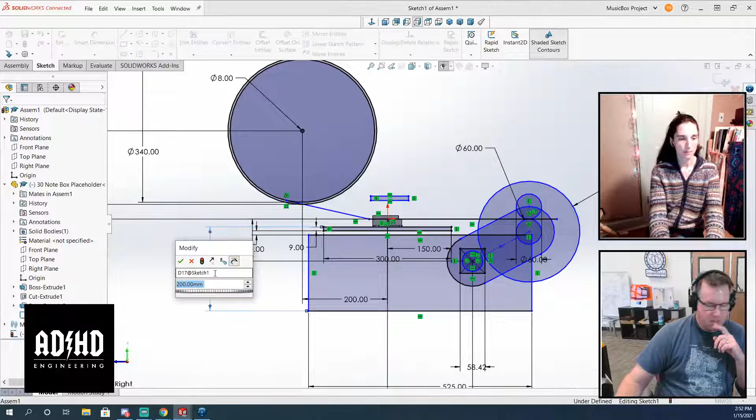Is that with or without the soundboard? That is just the box. So just whatever is above the box. Yeah. All right. So I'm gonna do 220. Okay. Yeah, I think if we can get the aesthetics so that they are strongly reminiscent of the original product, that's not a bad thing.

Does that look about right? No, I think it's got to be. I'm gonna finger measure it. 1, 2. Yeah, about.

Well, is that 1.5 fingers? Is that a metric unit? No, it's. You gotta get out your finger dividers. I'm not actually using it. Don't worry about it. Okay, so Max, for accuracy, you draw a thing on the screen which is a precise measurement. Then you have your fingers like that, and yeah, it's mixed. Yeah, it's mixed units, yo.

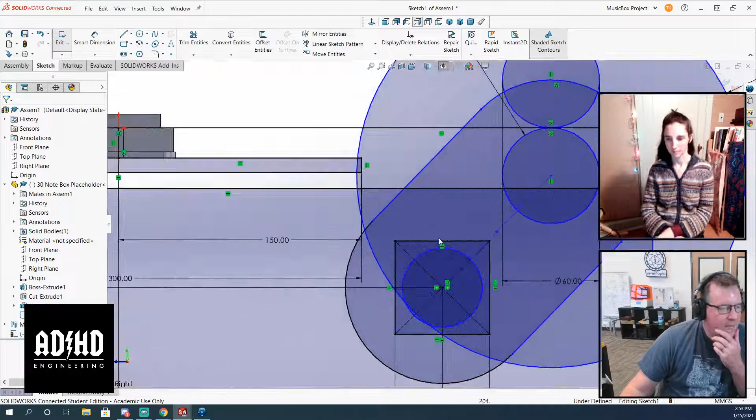I need to figure out where all these things are going to be. The thing I'm worried about here is that if we have the motor internal and it's down here, the way to have good pressure, let's say if we did have a tensioning mechanism that was kind of coming off the edge, would be for this to be at a shallower angle rather than straight up and down. If this thing is straight up and down, you can't rotate it very far. You can't produce much of a gap by rotating it. So I kind of want this to be a little bit further right. Yeah.

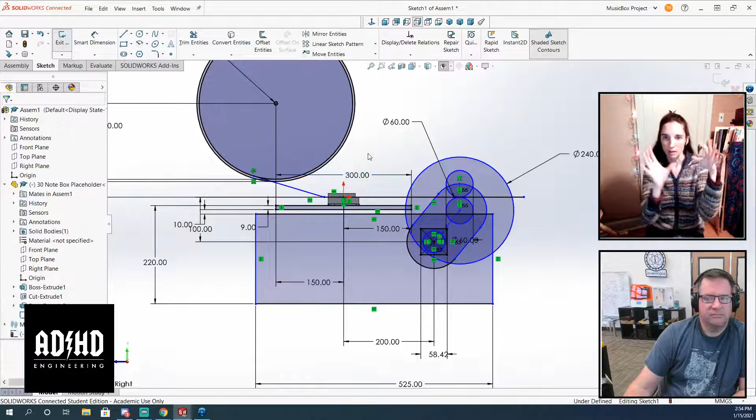Hey, we've got a question here from Yoran. He says, do we need a big wheel? Can it be 5 little wheels in a pentagon shape so it can become smaller to fit in the box? I don't know. I kind of like that idea, but it should be a round shape because there's circles all over the MMX. This is definitely intended to be a circle. So I probably gotta have like spokes or something. Yeah, we definitely need rotating spokes. That's the aesthetic.

Please save the file. If you crash, you lose everything. Oh, well, I don't mind. So this is one thing I've learned, especially in the Fusion project, which is that you can already see what a mess I've made of the dimensions. If you were to design this thing to our CAD standards, I've already probably made 15 different sins. I'm gonna save it. I'm gonna take the hint. That's why you gotta redraw it 2 more times until you get a good one.

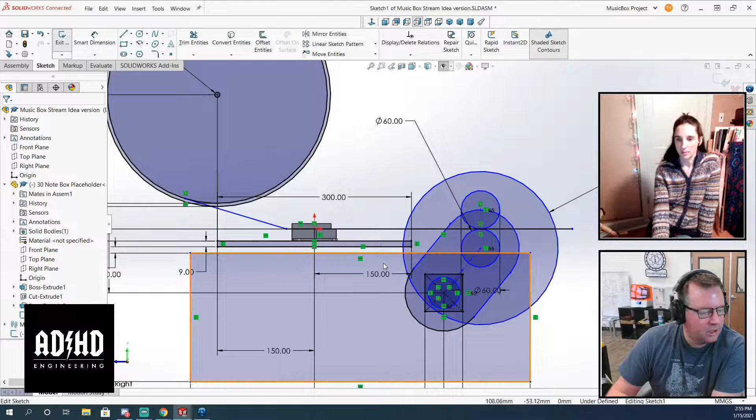Yeah, that's one of the reasons I haven't said anything, because to be honest, early on in the process, sometimes you have to just go with your gut and then fix it. You're just doing quick spitballing, man. It doesn't matter if it's perfect. This is just idea, fun stuff. Quick and dirty, slap some stuff in there and see if it works or not, and then you make it pretty. Right.

What do you guys think about having this line be tangent to the edge of the drive roller? SolidWorks doesn't like that, so I guess that's a no. That's because I accidentally made that one thing coincident.

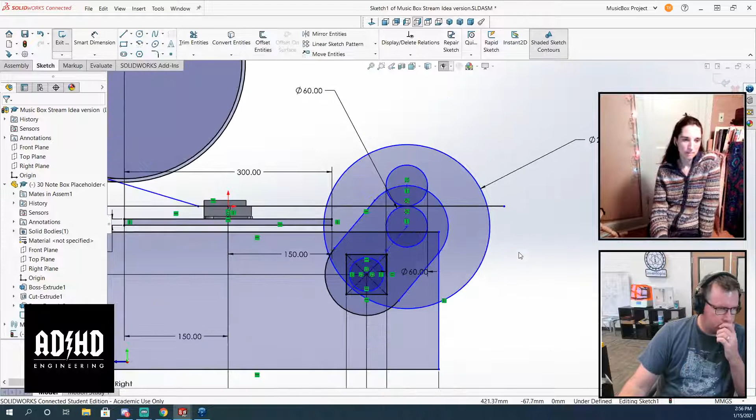Have a circular frame with the smaller wheels inside it. It would look a bit like the planetary gears on the MMX. Ooh. That was Yoran's comment again. You could do something cool where the planetary gears are actually the bearings, and it's held in place by gears, so it doesn't actually have a hub. It's just a hoop, and then you get the gears pressing on it. I don't know if that's a great idea. But maybe.

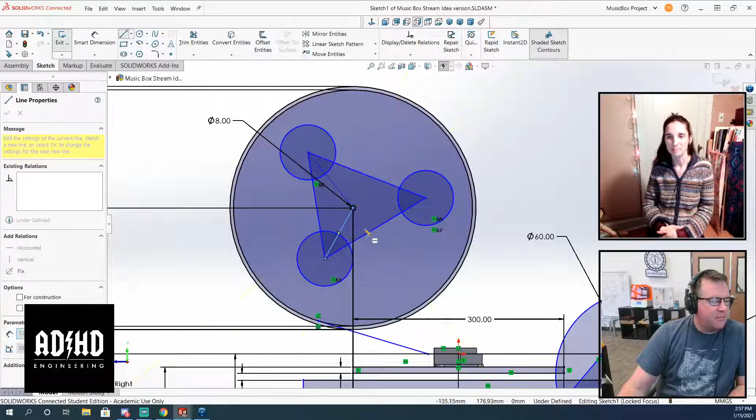Yeah, I realized I could have done this with a polygon. I just couldn't find it, and talk about quick and dirty. Woof.

No, the idea was to do this for 2 hours, and so closing this up in about 3 minutes.

That's the idea. Okay. You have to draw like a pentagram. That's the only way that you can make it work. Like that other part we were looking at. I forgot what it was. Oh, what was that? The hidden pentagram inside. Oh, it was the flywheel, right? Was it the flywheel? With the five hole pattern that was like a pentagram. Yeah. So good. So in this case, you'd probably be better off doing a pattern anyway. Good point. Well, I just wanted to kind of look at visually, what did I just do? I exited the sketch.

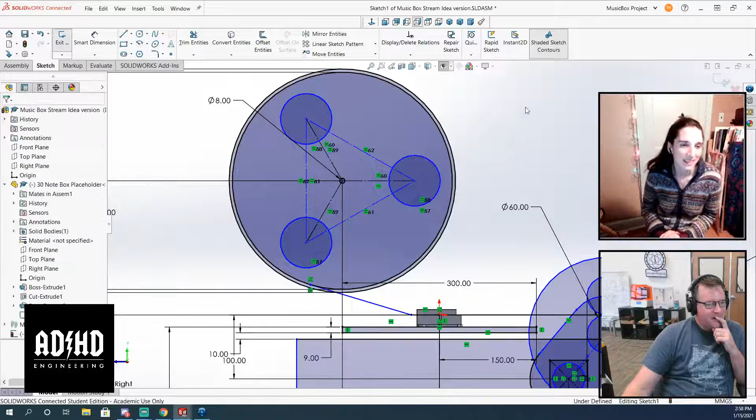It's funny how the delay is getting longer and longer too. It's weird. Save! Oh, because the delay extending means that your computer's dying. Is that your experience, Maureen? Oh, always. If your computer starts acting buggy at all, immediately save. That's my trigger. Like, oh God. There is no delays happening on my lightning fast machine right now. That's just YouTube. All right. So that delay. Oh, I see.

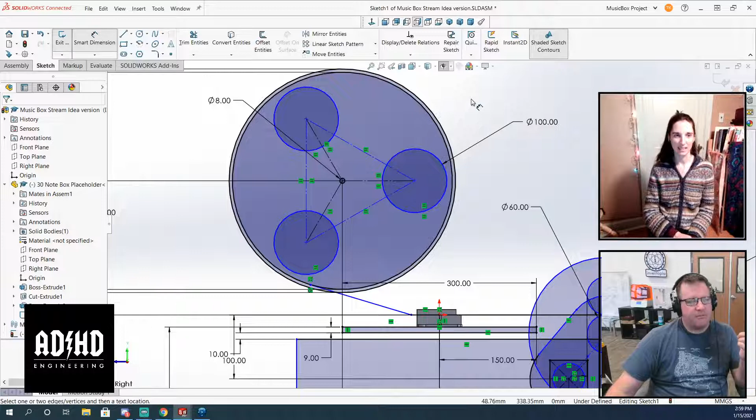I like this idea, especially as the tape gets pulled off, these are idler wheels and they rotate on their own because they're in contact. That would be cool. I have no idea what that means. Someone want to translate? What's an idler wheel? So an idler wheel is one that is driven by the process. It's not connected to the motor. Right. Okay. So it's like idling. Got it. Yeah. It is driven. And so normally in any sort of drive relationship, you'll have a driver and an idler, and the idler is the one that's just coming along for the ride.

It's idle. Okay. Yes. But yeah, I could see us putting a sleeve of basically like a roll of tape, or maybe just the paper. No, because that wouldn't stay round. We could put just a round thing over this, and as it unwinds going around, those other wheels would spin, and it's a cool idea. I can see it, and that's staying within our design constraint of matching the MMX, like planetary gears on the music box.

That'd be cool. Also, yeah, there's a differential here, right? Do we want to match the MMX, or do we want to match the original music box and let it be? We want to upgrade the original music box in the same vein of the design of the MMX. Yeah. Right? Yeah, and there's always that question. Do we introduce mechanical complexity for no reason? And the general design thinking is you never want to do that, but the MMX is the MMX. So we're still within our design constraints if we do that.

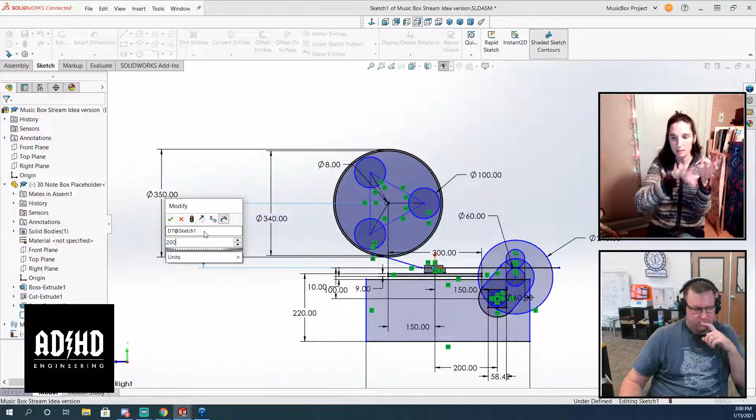Yeah. We're not changing the function of the original music box, all the things that it does, including spilling paper on the floor and turning a big wheel. We're not changing that. We're changing the aesthetic to match the MMX. Right. So okay, so it's now been 2 hours. Yep. So do we want to give assignments to the team for this coming week to play with stuff? Like how much do we want to get into this whole process?

Let's not do assignments. I think we've explored several different ideas that are in consideration. And so what I'd like to do is just challenge people, whether they're part of the CAD team or not, to feed ideas for how we could meet this design challenge, whether it's something we talked about on the stream or not, or it's a furthering of one of the ideas we've already talked about.

I think what I want to do is look at some of those ideas. We have ideas for how we're going to tension the tractor for the paper. We didn't get into the suspension for the soundboard, but I think we're just going to knock off exactly what Martin already did.

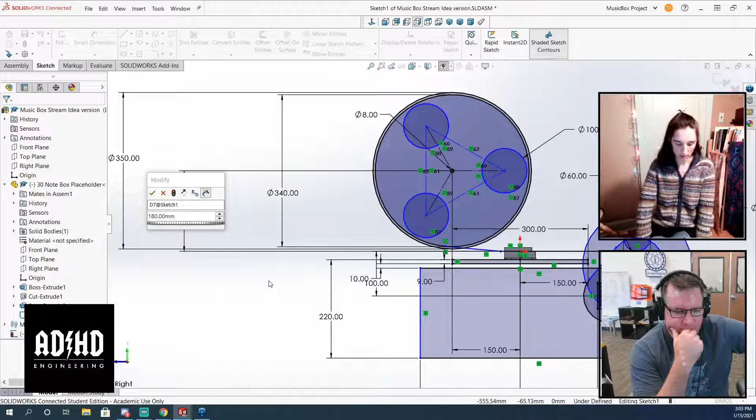So, okay, how about this? What if you wrote out a little, I don't know if we want to call it a project charter, but just that overview in your notes. What if you wrote out sort of the conclusion of this meeting and shared that in Discord? What I'm going to do right now is make a new CAD Team channel called CAD Team Music Box. This will be our test for phase 2. So if anybody wants to discuss this or share ideas, all that should be funneled straight into that channel.

Is that a CAD Team channel, or is that open to the public as well? I think it should be open to the public. It'll be in our CAD Team list, but I'll have it be open to anybody who's CC agreed. And so we will open submissions for ideas that we could talk about next week. But we can also iterate on each other in that channel to get the discussion going, and maybe we can come to some conclusions by the next stream like this.

Yeah. So what I would love to do is have some ideas, and then also have a little bit of time so that next time we look at this, instead of just looking at a sketch, we have a little bit more of a model to play with, incorporating some of those ideas. So are you saying you're going to do that, or you want some of the CAD managers? I want to see the ideas, and again, we're not dealing with any parts that are so detailed that we need to farm this out to the team, right? We're not farming out. We're in idea gathering mode.

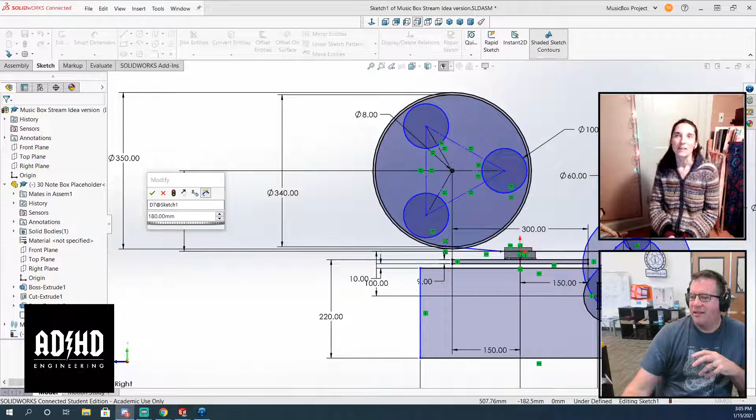We'll have to come up with a name for all these different stages. Ideation. Oh yes, that's what you're calling it. Sorry, I've forgotten. What people like me call it. Yes. Okay, so we're in ideation mode, and that means... Andre just posted a fun gear thing in the chat. Okay, sorry, I'm getting distracted. I totally just lost my train of thought.

So what I wanted to say is, it doesn't matter what software you want to use. Crayon drawings, pen and paper, any CAD program you want. Post whatever you want inside this new channel that I'm about to create. So this is pre-SolidWorks ideation, and then we'll work it up in SolidWorks. You can also work in SolidWorks if you have access. So how's that sound? Sounds good to me.

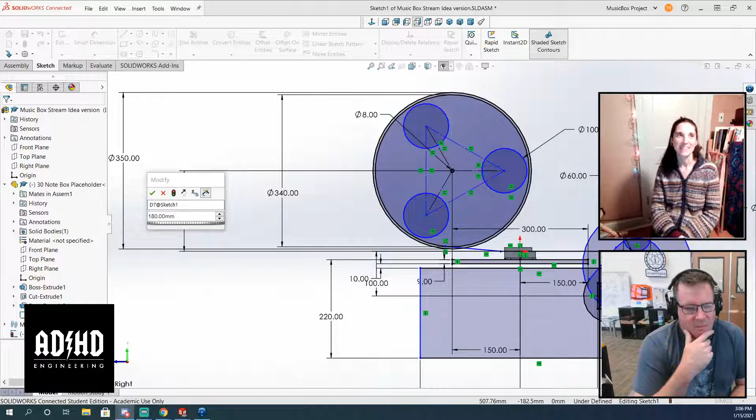Any last thoughts from anybody in the chat before we sign off for our first little stream? Well, technically this is our second stream. I think the Christmas party was the first stream, and you need to put that in the streaming part of your channel. I think that's the best way to have this channel be sent off. I never look back, darling. That's my best Edna Mode voice. No, that's like hitting the champagne bottle, sending us off on our voyage. Right. Party with ridiculous CAD challenges. Right. Okay, I think that's it.

We'll look for some ideas. I'll firm up some of the things I think are built in. I'm going to try to get that stepper motor in here, but if we make any design decisions and later someone comes up with a better idea, we will meet and redo. I love doing that. Well, I don't love doing it, but I'm accepting of it.